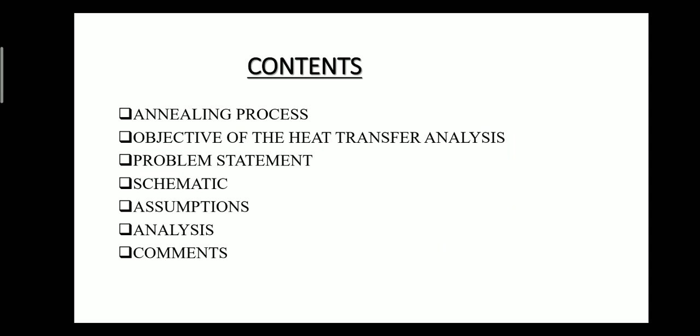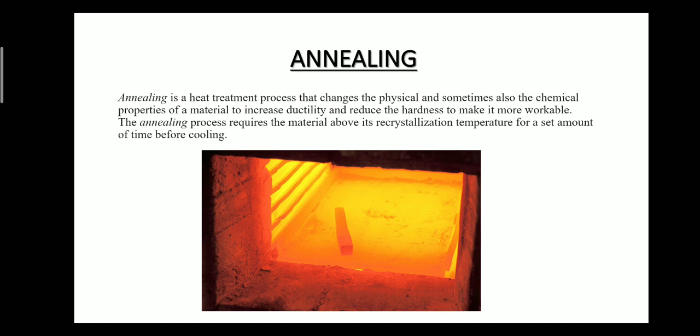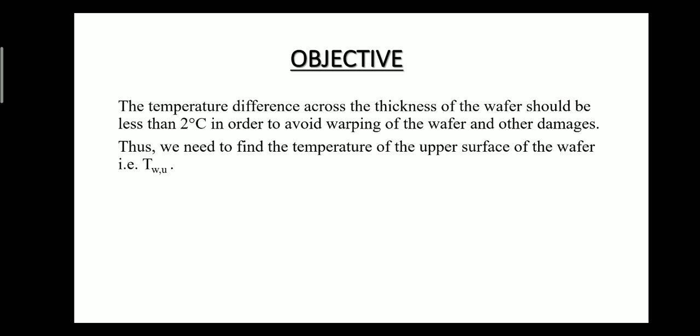Now the objective of the problem. We have to find the upper surface temperature of a silicon wafer. The silicon wafer has been used in the problem and it is mentioned that if the difference in the temperatures of the upper surface and the lower surface of the silicon wafer is less than 2 degrees Celsius, then the silicon wafer will be able to avoid warping and some other damages as well. Thus, the temperature of the upper surface of the wafer needs to be known.

The problem statement. Let me put it in short. We can see a silicon wafer that has a thickness of 0.78 mm. The lower surface temperature of the silicon wafer is given as 997 degrees Celsius. The silicon wafer has been put inside an evacuated chamber. The wall temperature of the chamber is 27 degrees Celsius.

There are heating lamps that provide a radiant flux of 3 × 10⁵ watt per meter square. An emissivity that equals its absorptivity is used, that is, epsilon is equal to alpha is equal to 0.65. The value of the radiant flux has been given and the thermal conductivity of the silicon wafer has been given as 30 watt per meter Kelvin.

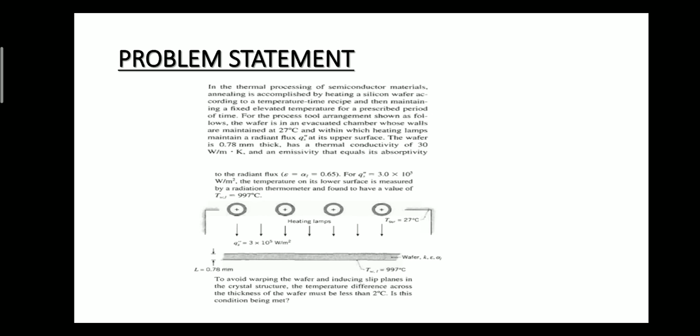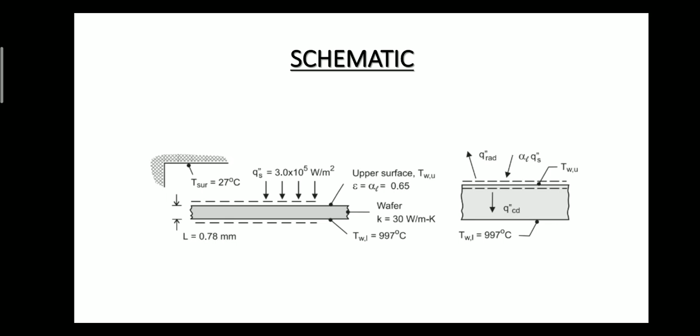We can see the alpha L q''S. It is the amount of radiation that is being absorbed by the silicon wafer. Some amount is being radiated out as well, that is mentioned as q''rad. The q''cd shows the conduction process as the conduction is going on from the upper surface to the lower surface of the silicon wafer. We have to find the temperature of the upper surface.

Some assumptions have been made. Steady state conditions, which say that the temperature will not change over time. One-dimensional conduction inside the wafer. This is because the heat is being transferred only in one direction. Thus, in Fourier's heat conduction formula, instead of dT/dx, we can use ΔT/Δx as it is a one-dimensional conduction.

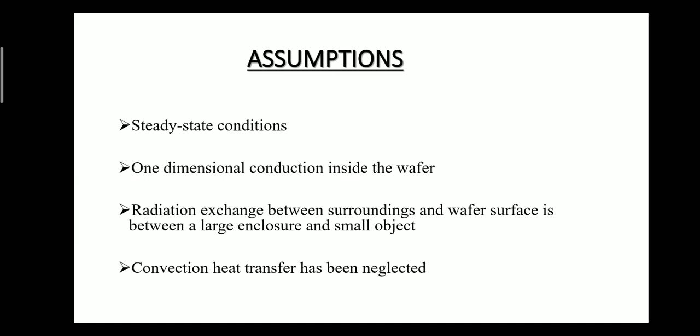The radiation exchange between the surroundings and the wafer surface is between a large enclosure and a very small object, and convection has been neglected as the wafer has been put inside an evacuated chamber.

The analysis. As we have seen, there are only 3 processes going on in this problem. Some of the radiation from the heating lamps is being absorbed. There is radiation heat exchange with the chamber and conduction inside the wafer. Using the surface energy balance, we can put the formula in this way: E''in minus E''out equals 0.

Now the alpha q''S is the amount of irradiation that is being absorbed by the silicon wafer. The q''rad involves the radiation exchange with the walls, and the q''cd is the heat transfer by conduction. Now the heat transfer by radiation is seen as epsilon times sigma times (T_wu⁴ minus T_sur⁴).

Here T_wu is the upper surface temperature of the wafer and T_sur is the surrounding temperature, as the radiation is being exchanged by the upper surface of the wafer as well as the surroundings, which involves the chamber walls. For conduction, we have used Fourier's law, that is k ΔT/L. L represents the thickness of this silicon wafer.

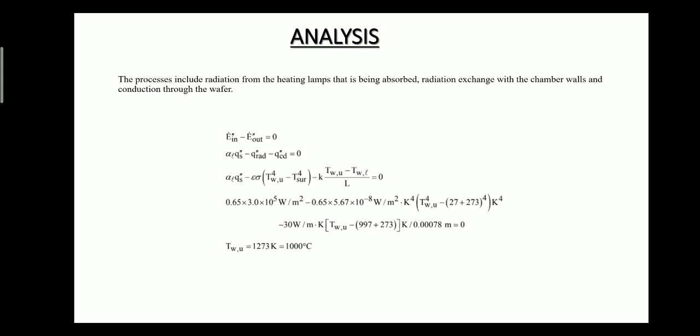Thus, on calculating, we get the upper surface temperature as 1273 Kelvin, which is equal to 1000 degrees Celsius. We have seen that the temperature difference between the upper surface and the lower surface is more than 2 degrees Celsius. Hence, warping of the wafer and inducing slip planes in the crystal structure will occur.

The most important part of this problem solving is that we should not forget to express the temperature during the radiation heat transfer in Kelvin units. This was all about the problem.